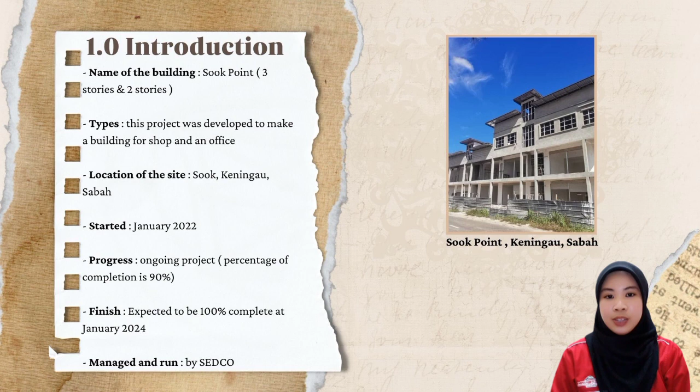Causes of building foundation failure. A site investigation was performed to determine the failure mechanism and damage impact of the pile. To collect any relevant information, this project has already gone through 2 piling failures on different grids. The following are some cases where pile failure has occurred on the site. Case 1: one of the concrete piles broke due to the hard soil. Case 2: the pile that has been used does not meet the specification.

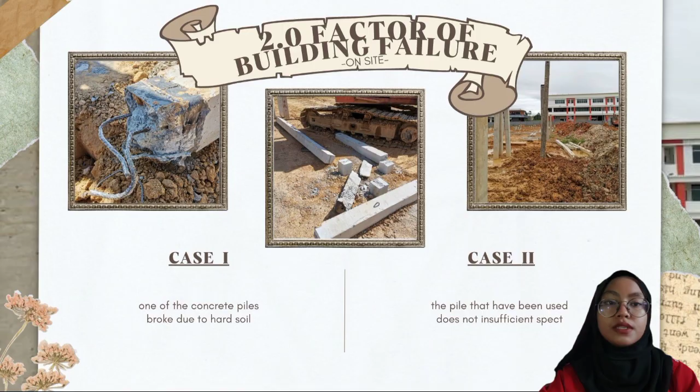According to the site inspection, the failure that occurs is broken concrete pile, and failure identified by a non-uniform number of blows, which can cause the pile to not go into the ground according to the spec that has been set. I'll be presenting about the failures that may occur to the foundation.

So building failures can often be caused by various reasons, often involving a combination of different factors, and some of the common causes include: the first one is foundation issues. Problems with the foundation such as poor soil condition, improper site preparation, or inadequate depth and strength of the foundation can cause structural instability over time. Settlement, subsidence, or shifting of the foundation can also lead to significant structural damage.

The second one is poor construction quality. Substandard materials, inadequate workmanship, or disregard for building codes and standards during construction can compromise the building's integrity. Issues like improper reinforcement, faulty installation, or inadequate supervision can also contribute largely to failures. Third is design errors. Mistakes or oversights in the initial planning and design phase can lead to structural weaknesses. Errors in calculation, improper load distribution, or inadequate consideration of environmental factors can result in design failure.

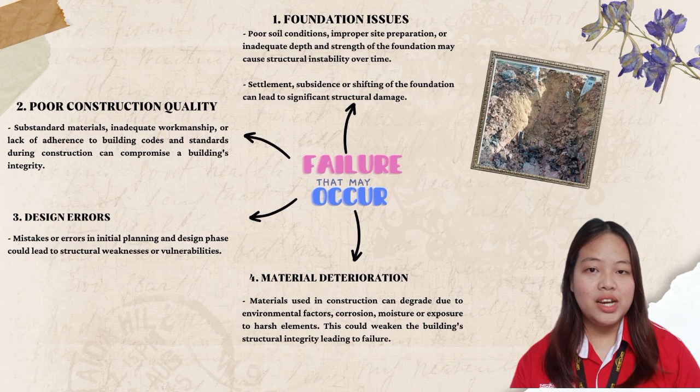Lastly is material deterioration. Over time, materials used in construction can degrade due to environmental factors, corrosion, moisture, or exposure to harsh elements. This deterioration weakens the building's structural integrity and can lead to failure. There are several methods used on the site to overcome foundation failure, such as setting out a new point for a new pile. Drawings will be sent back to the client, engineer, and architect to determine the location for the new pile point. Drawings and location are renewed to ensure a successful foundation.

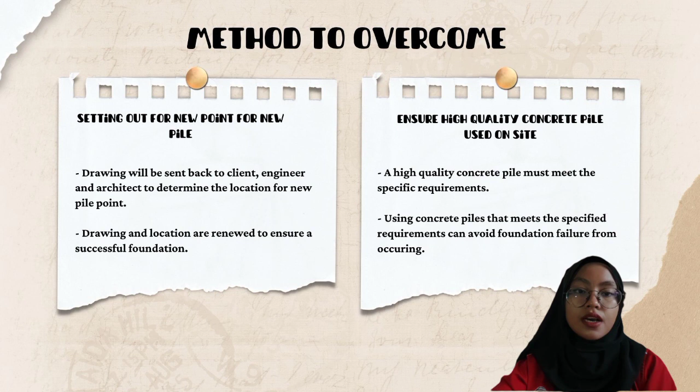Other than that, ensuring high-quality concrete piles are used on site. A high-quality concrete pile must meet the specific requirements. Using concrete piles that meet the specified requirements can avoid foundation failure from occurring. So, based on analysis in this case study, we found out that two piling failures occurred on different grids due to the poor condition of the soil. We can detect it by the number of blows in the soil that do not comply with the specific spec. In addition, there are factors that affect the failure of the foundations, such as poor construction quality and materials.

We can say environmental factors like corrosion, moisture, or exposure to harsh elements on steel reinforcement, and the poor grade of piles from the factory of the material suppliers also have an impact on the building accommodating the load, which can cause the beam or column to crack over a long time, whether 2 or 3 years, we can get data from that. In addition, unskilled or inadequate workmanship is also one of the factors in building failure, because they work without following the procedures established by the standard construction specifications.

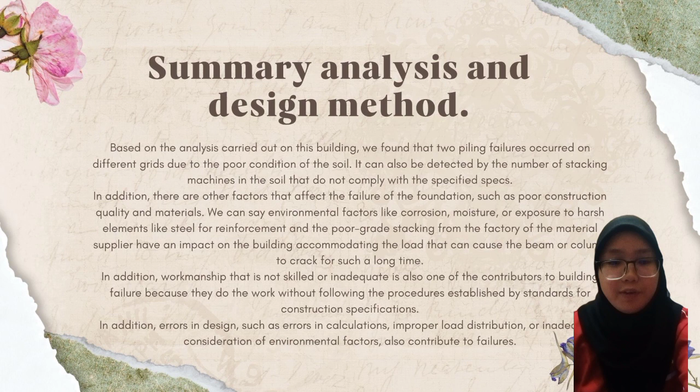In addition, errors in design, such as errors in calculation, improper load distribution, or inadequate consideration of environmental factors can also contribute to the failure. To solve these problems, one of our recommendations for improvement in geotechnical practice in this case study is the ground improvement method. This procedure is typically defined as using mechanical means to improve poor ground conditions. This method can also improve the engineering properties of the soil mass, which is treated to meet the project performance requirements. One of the techniques we use is deep soil mixing.

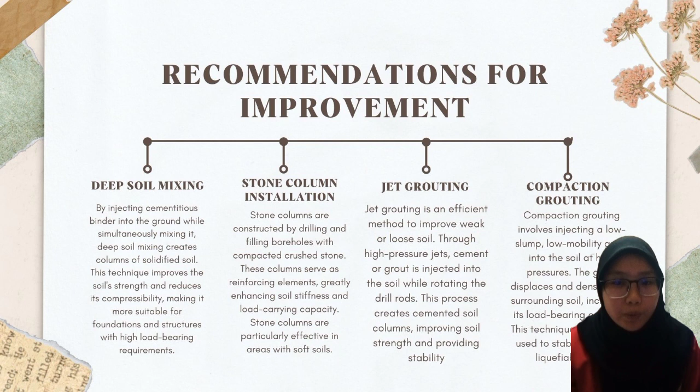This technique will improve the soil strength, reduce its compressibility, and make it more suitable for foundations and structures with high bearing load requirements. The second technique is stone column installation. Stone columns are constructed by drilling and filling boreholes with compacted crushed stone. These columns serve as reinforcing elements, greatly enhancing soil stiffness and load carrying capacity. Stone columns are particularly effective in areas with soft soil.

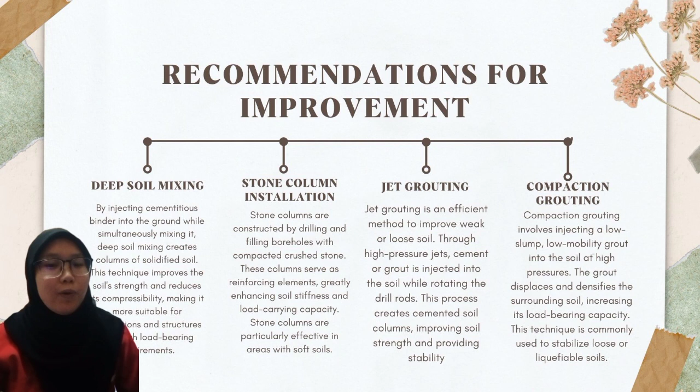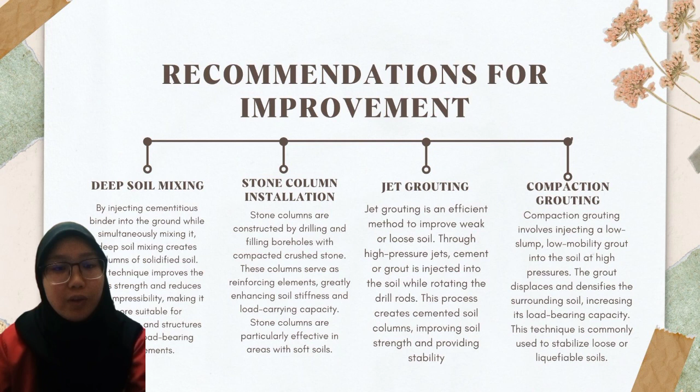The third technique is called jet grouting. This method is efficient to improve weak or loose soil. Through a high pressure jet, cement grout is injected into the soil while rotating the drill rods. This process creates cemented soil columns, improving the soil strength and providing stability. Then there is compaction grouting. Compaction grouting involves injection of low slump or low mobility grout into the soil at high pressure. This grout displaces the surrounding soil and increases its load-bearing capacity. This technique is commonly used to stabilize loose or liquefiable soil on the site.

In conclusion, our recommendation for future work is to make sure concrete piles are ordered and bought from a factory with approved performance, to make sure the pile foundations are high quality with an appropriate grade suitable for the foundation on site. Next, carry out appropriate soil testing in order to prevent finding hard soil during the installation of pile foundations.